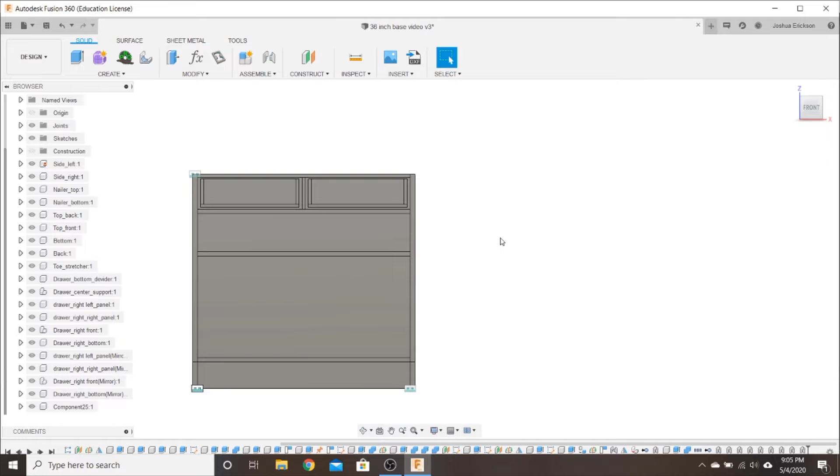This is going to be video 4.5. I realized that I had skipped some steps in the last video when I went straight to creating tool paths for this cabinet. I did that without showing you guys how to create your doors and without showing you how to modify the cabinet and to actually build out your cabinet and to bring more cabinets into this.

Also, I said in the beginning of this series that we would be able to do every cabinet in your kitchen with this one file. And I think you could do it, but it took me longer to go through and to edit all of the parameters that needed to be edited and then to fix whatever little issues might come up to turn this file into an upper cabinet. I think it could be done. I think maybe I didn't take the proper approach to do that.

I had trouble when I adjusted the toe kick parameters to 0 because the upper cabinet doesn't have toe kick. When I adjusted it to 0, it threw the shelves and some others. It just kind of made it all wonky and it didn't work very good. And I think it's because of this board here. It didn't know what to do with that or where to go with it, so I just tried removing it. And it just got weird, and it took me longer to change the parameters and to figure all that out than it did to just make a new file for your upper cabinet.

So I'm revising what I said a little bit. You can make all of your lower cabinets from this one file, and then you'll do a second file for your upper cabinets, but the process is the same. The upper cabinets are nothing but your carcass and a couple of shelves. No drawers, no center divider, no toe kick. The only difference for your upper cabinets is that instead of just these two spanner boards, it'll just be a full top. But that's the only difference.

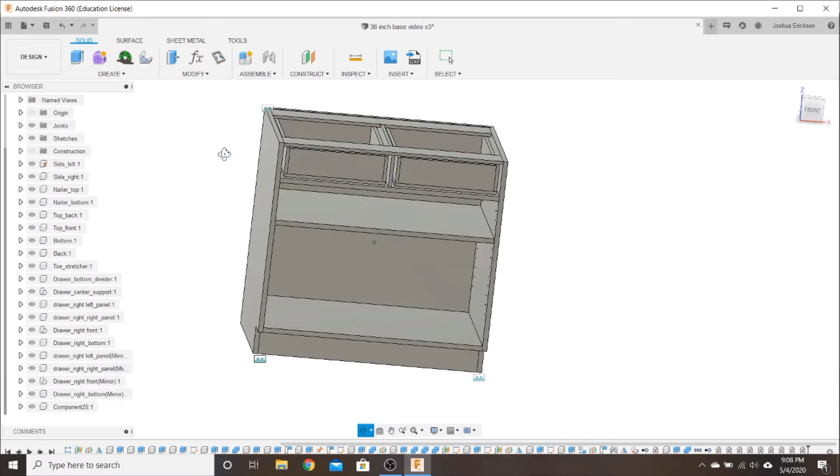So what we're going to do here is create the drawer fronts and the doors. So the first thing we got to do is create a new parameter, and that parameter is going to be named front gap, and that's going to represent the gaps between the doors and the gaps between the drawer fronts and the doors and just the gaps all the way around. Should all be the same. So I'm going to start with a 1/16 of an inch.

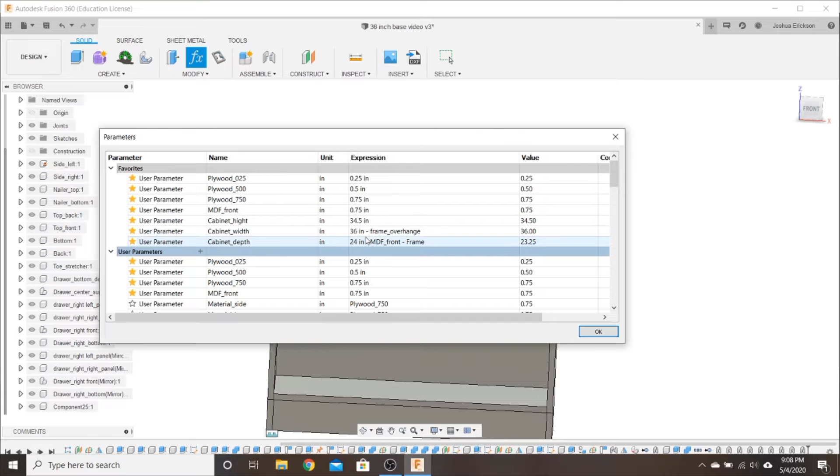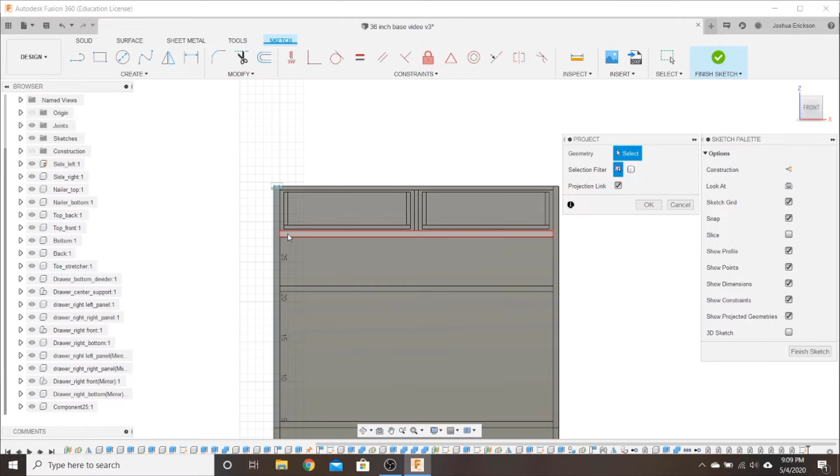Alright, so we're going to create a sketch right on the front of the cabinet. And now in this sketch, we need some information that we don't yet have. Well, we have the information, we just got to move it. So go to Project Include and go to Project. And we want this, pretty much the carcass is what we want, all the way around. And hit OK, and now you see it went purple, so we have that information now in our sketch.

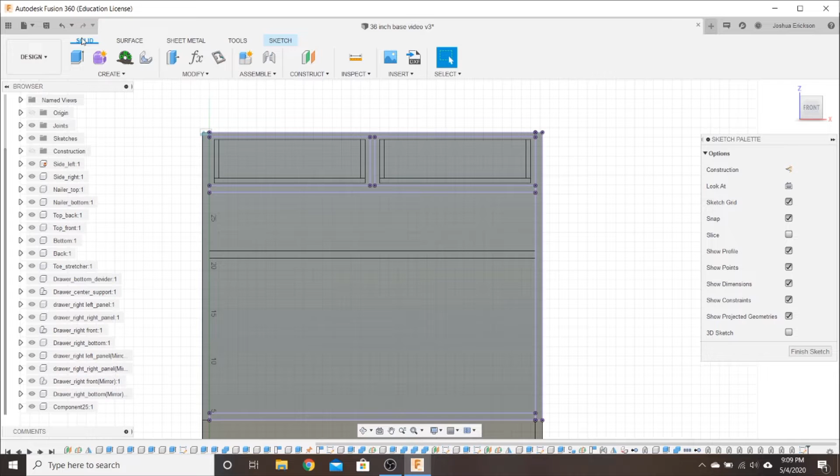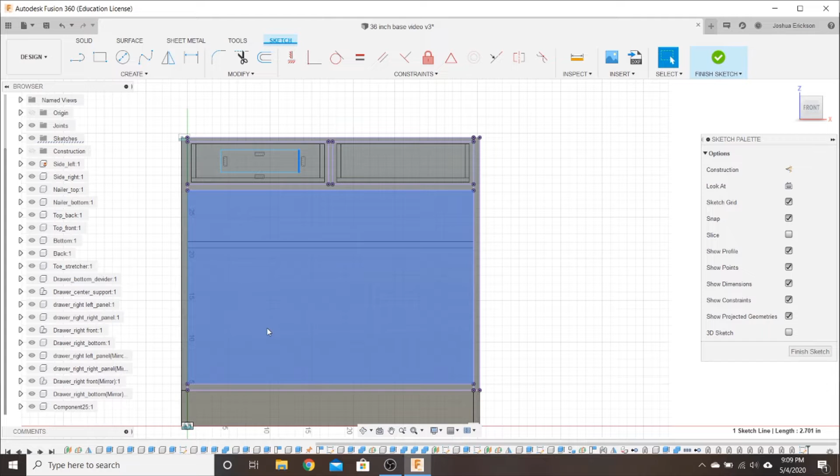So we're going to create a box for our drawer front, and we'll dimension this box out. Oh no, not yet. We need some reference points yet. We need to know where center is here. And we need a horizontal line here in the center of this board. So we're going to draw a line and zoom in here, and if you hover down over center, you see that triangle pops up? That tells you you're over center.

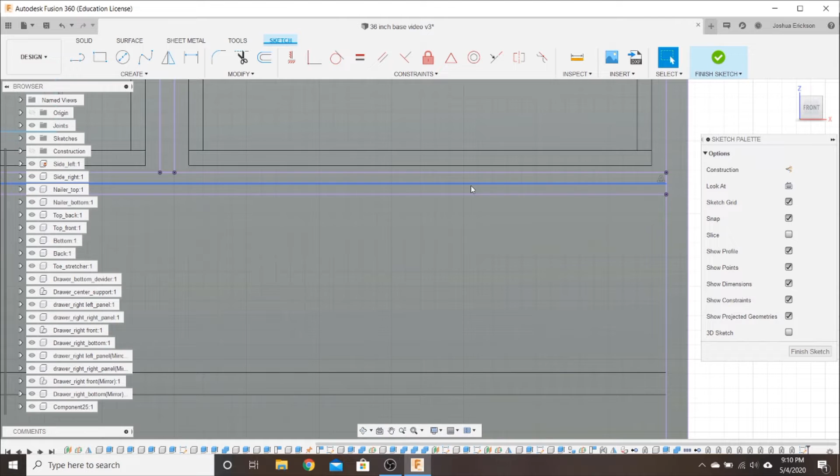Right there. This line represents the center where the drawer fronts and the doors meet. So if you right click on that line, we're going to turn it into a construction line. That means it's not going to show up anywhere else. It just helps us design here.

And we need to do the same thing here, so we'll find center, and we'll come all the way down to this line. And if you notice, you can see the degrees there. We want a plumb line. We don't want it to be off. So once you find 90, it also shows center there of the cabinet. Click on that and turn it to a construction line.

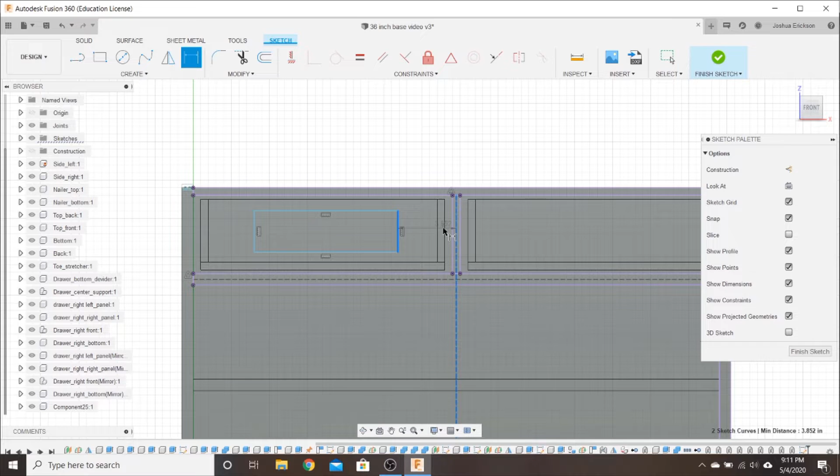All right, so now you can kind of see our 4 quadrants here that are going to be the doors and the drawer fronts. So we'll dimension this out. D for dimension, come over and find that construction line. And this is going to be front gap, but it's going to be front gap divided by 2.

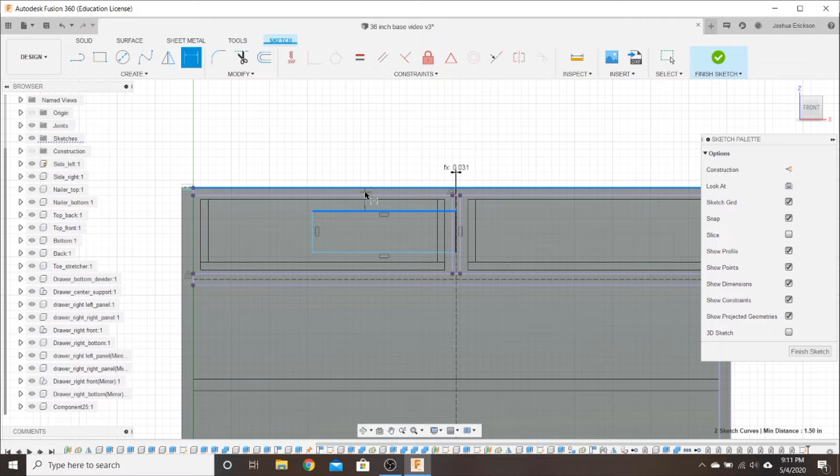The reason for that is there's going to be another one over here with front gap divided by 2, and that will give us a 1/16 of an inch gap right down the middle. So we'll dimension it to the top of the cabinet, and that'll be a 1/16 of an inch.

Now my countertops are going to be stone or some kind of manufactured stone, so there'll be no lip at the front of the cabinets. A lot of laminate countertops will have some kind of lip that drops down over the front of the cabinet. So make sure you're aware of that if you create your cabinets first and don't have room for that lip - you might have to move this drawer front down a bit.

This is front gap divided by 2 again, because there's going to be a cabinet on the left side of it. And this here is going to be front gap, again divided by 2.

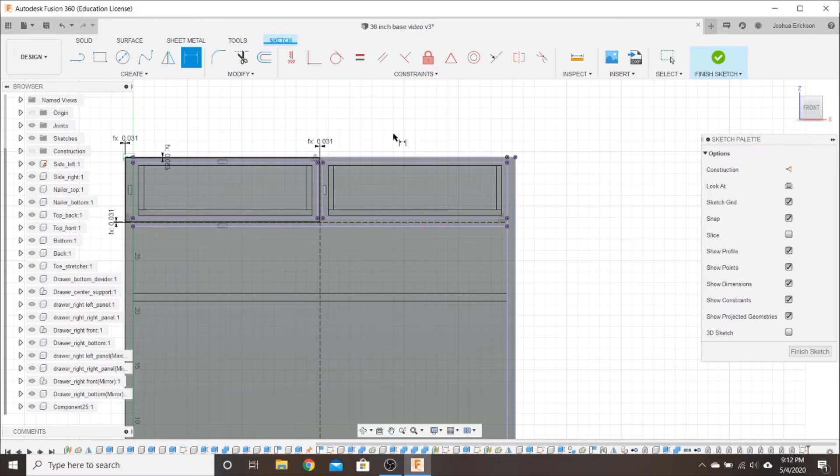Alright, so there's our drawer front. And we could mirror it, or we could just draw another one. So let's just draw another one, since it's not that difficult. Draw it out, dimension it.

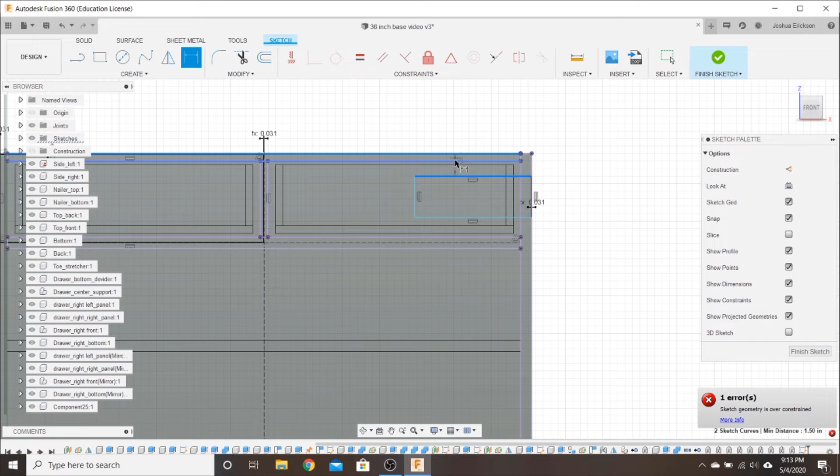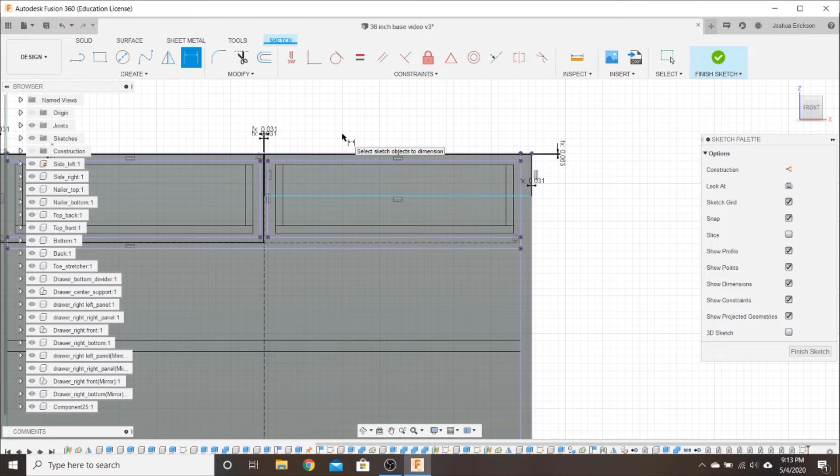What was that? Come on, you. There we go. I don't know, I was going too fast maybe.

So that's our 2 drawer fronts, and if you zoom in, you see we got a nice little gap between the 2. So now we can do our doors.

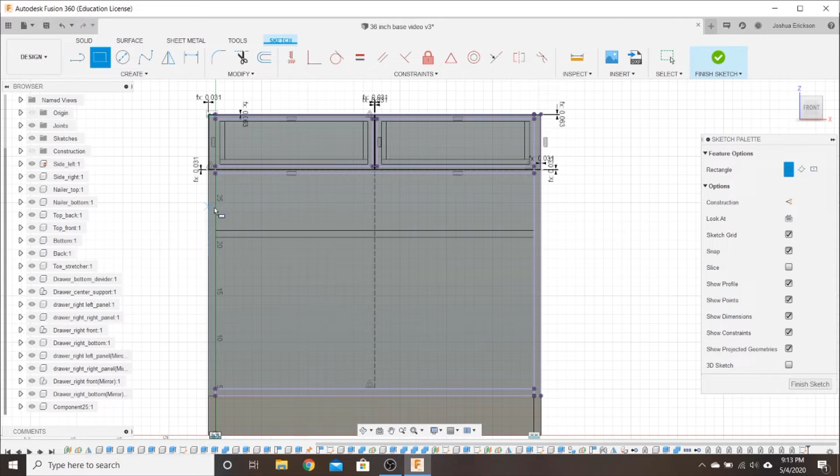So we'll just go ahead and draw a couple boxes right away and dimension these out. Oh my goodness. I'm hitting something.

I zoomed way in there because I wanted to make sure I got my construction line and not the bottom of the drawer front.

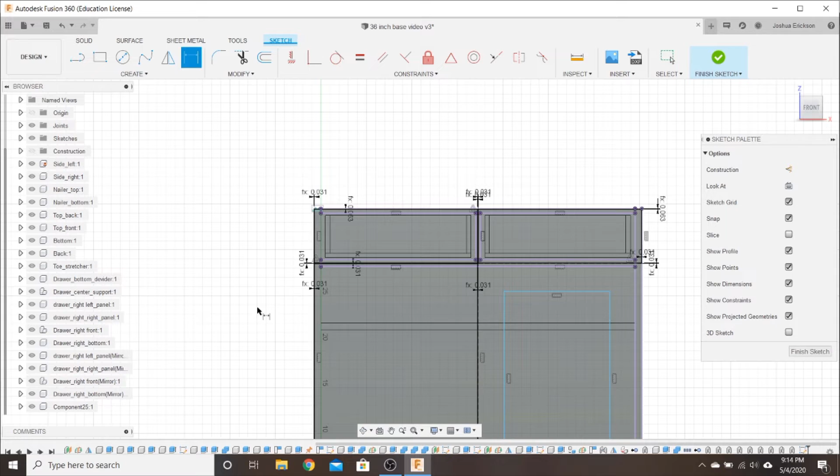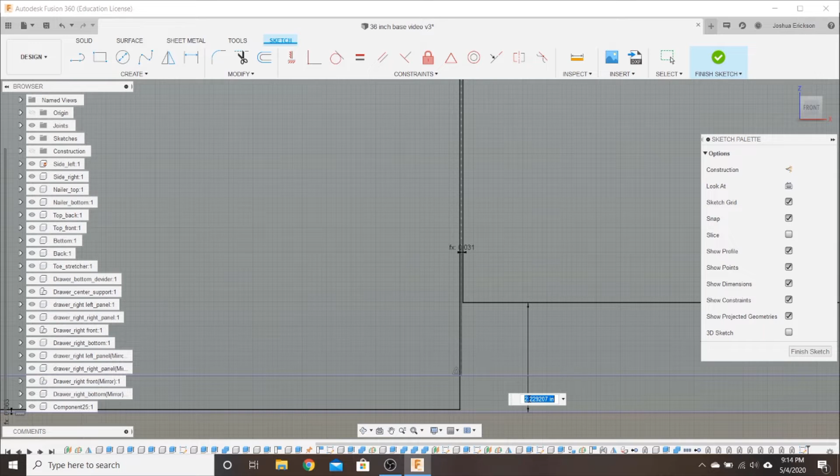Same as this. And this is not divided by 2 because it's the bottom - there's nothing underneath it.

Come on, man, what are you doing? I'm going too fast, that's the problem. I'm hitting buttons.

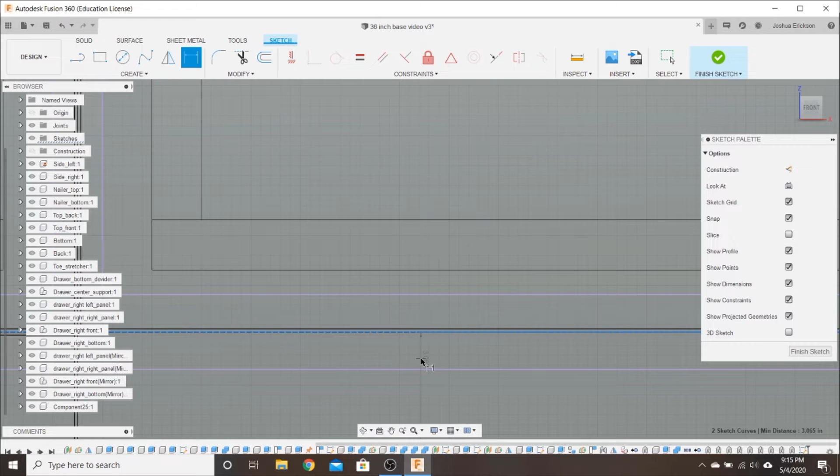And last one. Alright, there we go. There's our door fronts and our bottoms.

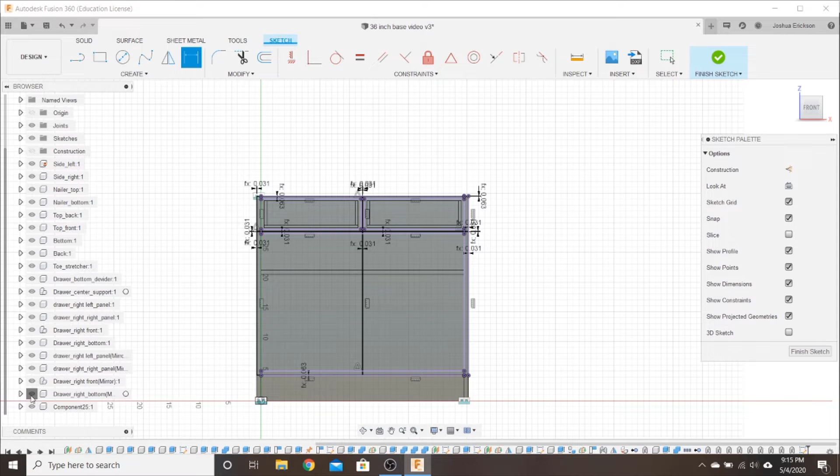So now what we can do is we can turn some stuff off here. Yeah, we'll just pretty much turn everything off.

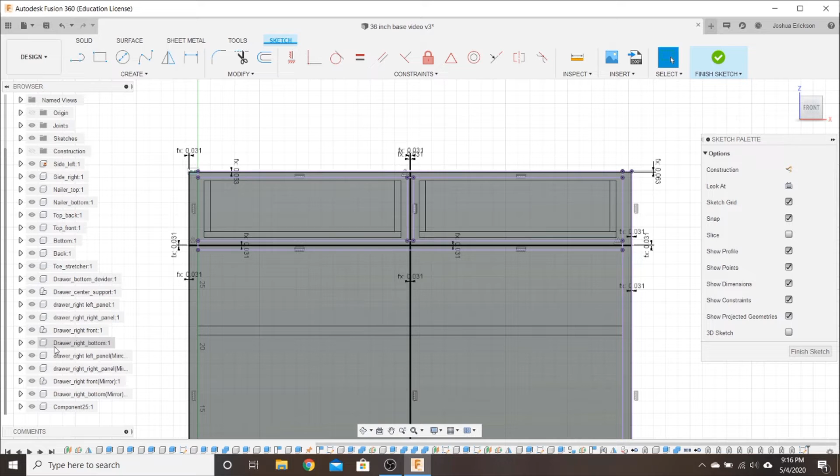What? I just hit Control Z for some reason. I'm sorry, guys. Struggling.

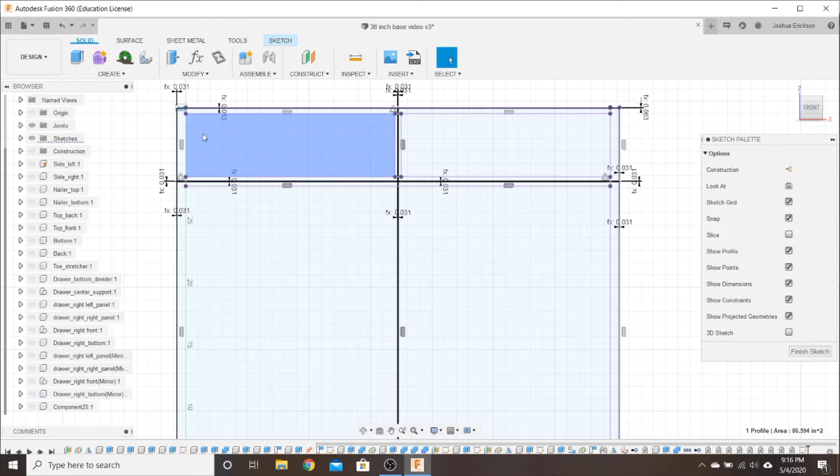Alright, so now we want to extrude these out. So we'll start selecting, and you gotta go around, and because we have this geometry from the cabinet, it doesn't assume to know what you want. So you gotta hold down Shift and go around and click on what you want to extrude.

There, and we'll extrude that, and this is going to be material - MDF front is what I named it. And it's going to be a new body - I'll make it a new component. Hit OK. Alright, so there's one of our drawer fronts, but we want to do more.

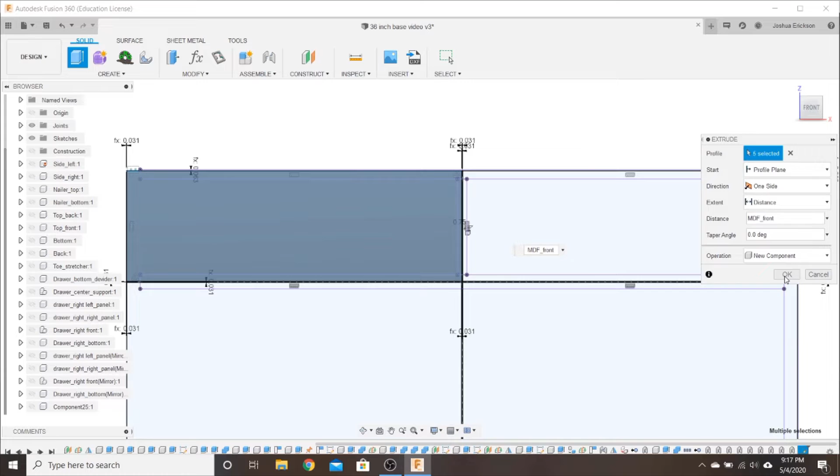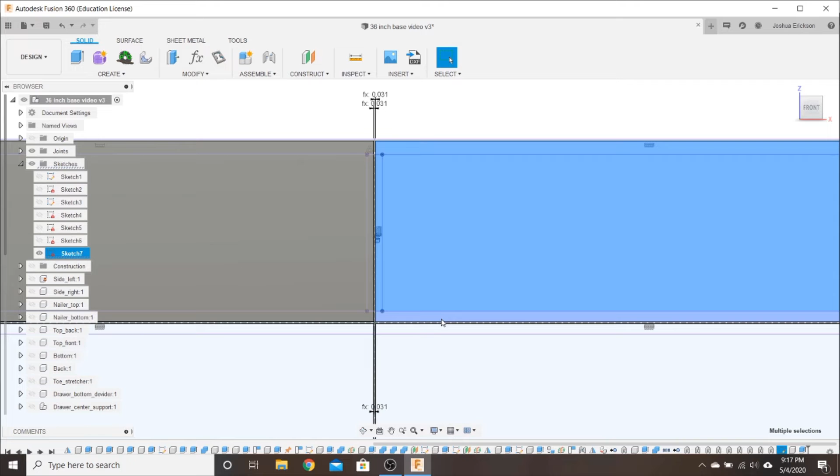So we'll get that sketch visible - Sketch 7, now it's visible - and we will continue to extrude out items here. So this is MDF front, new component, okay.

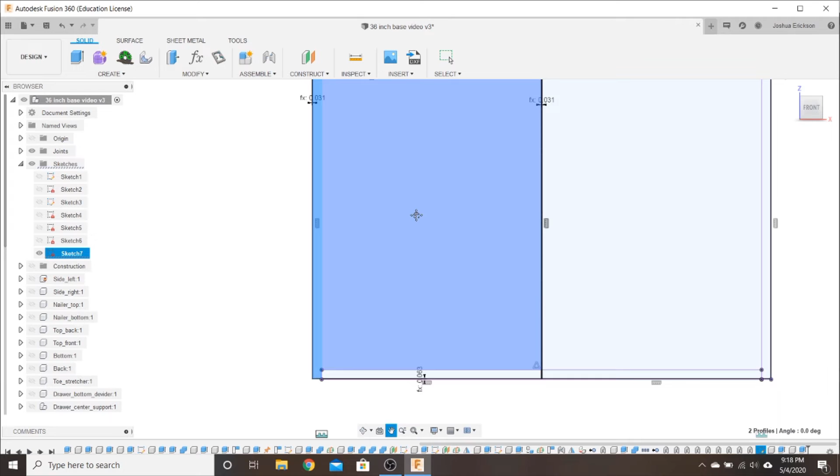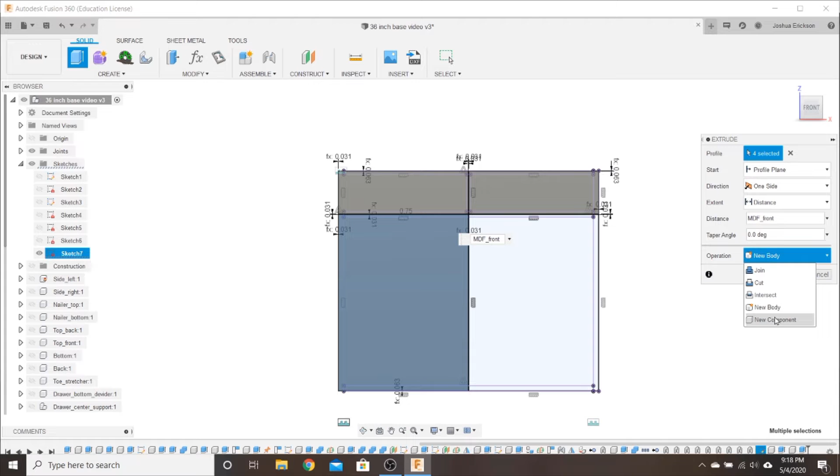I think my problem is I'm doing it at the kitchen table, and the mouse is not working well on the wood surface as opposed to my desk and mouse pad. MDF front, new body, new component, excuse me, okay, last one.

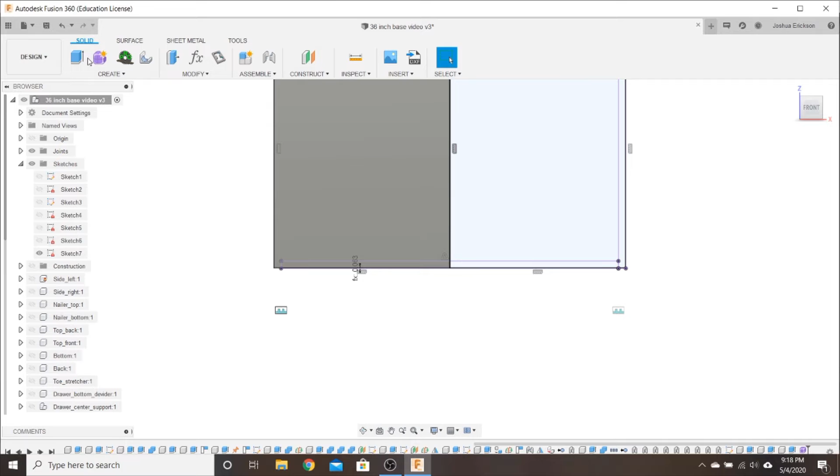Just struggling tonight, guys.

Alright, so there they are. Let me turn that sketch off. You can see we got nice even gaps all the way around. It's not a big enough gap that you're ever going to be able to see into the cabinet - it's 3/4 inch thick.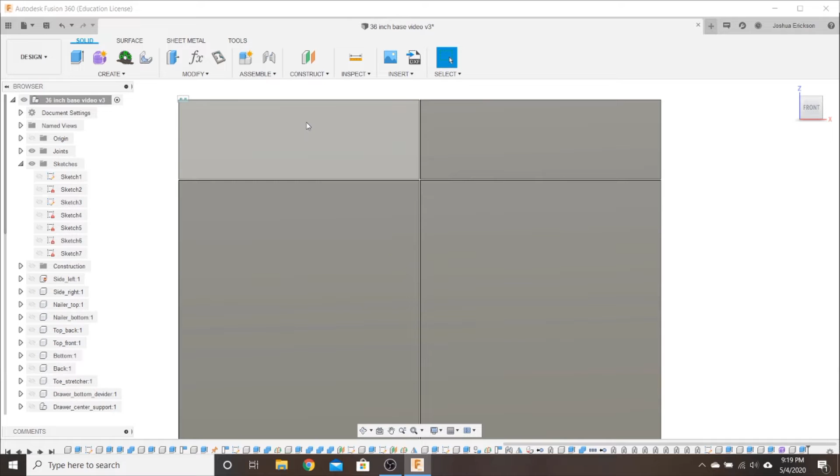So now what we can do is we can come up with some kind of style. My drawer fronts here turned up to only be 5 inches and whatever that is tall - I'm having a brain fart.

So I'm not going to do any kind of rail and stile on these - these are just going to be blank, flat. But I will do something here. So I think what we're going to do is just a very clean, basic frame and panel.

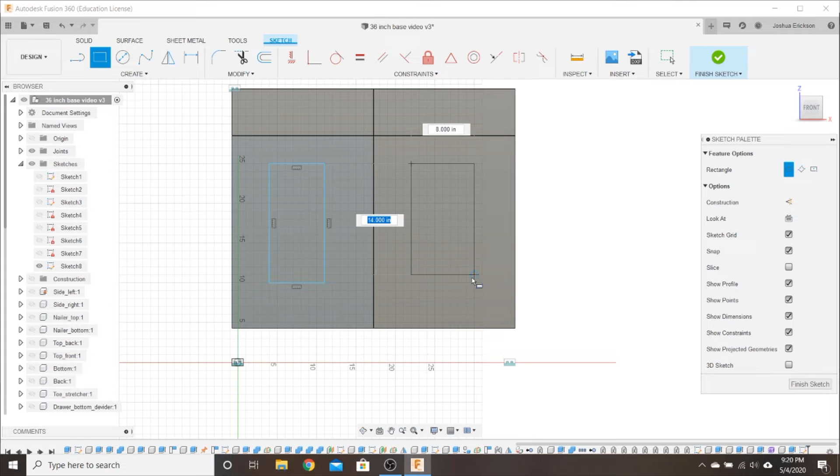So we're going to create a sketch right there, and we need to draw a couple squares. And now we're just going to dimension these against the door, and we're going to create a parameter for this.

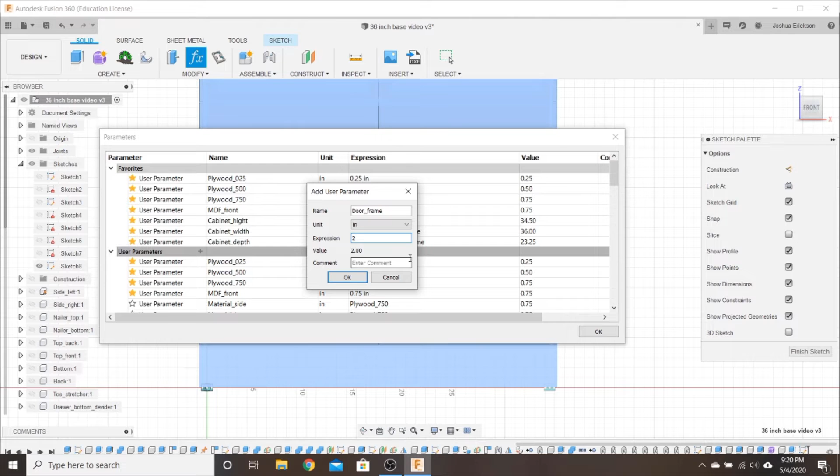It's going to be called door frame, and we're going to say 2 inches. So our frame - the rails and stiles - will be 2 inches thick, and that'll be adjustable. So we'll dimension that and say that is the door frame, and go all the way around, making sure you get your door.

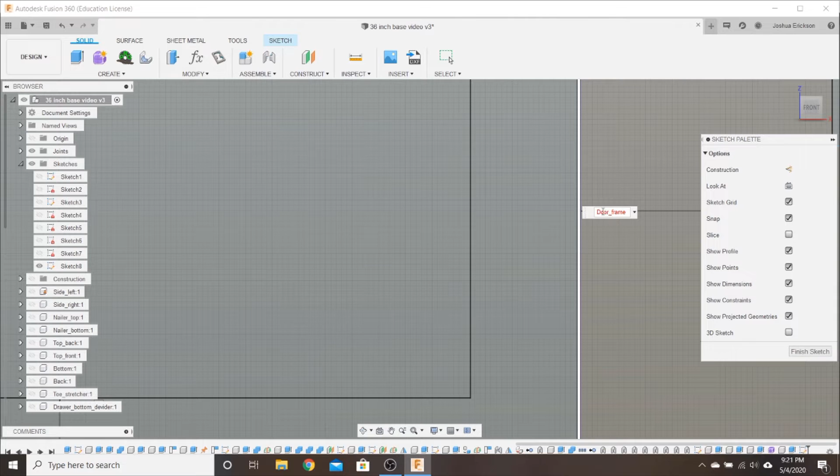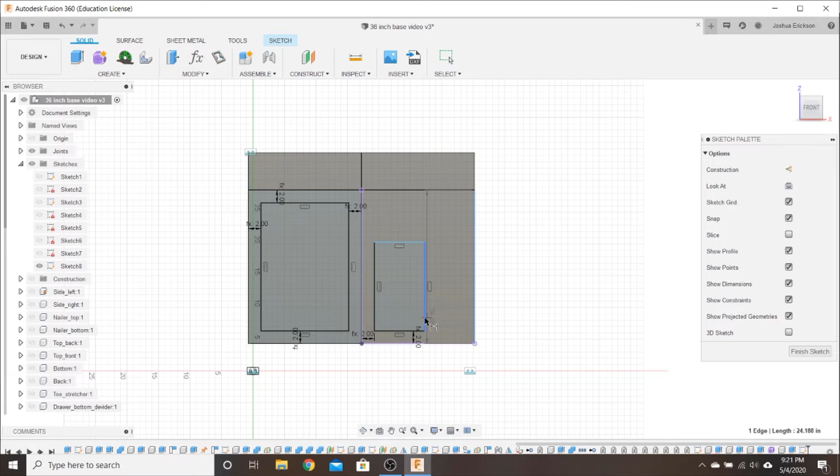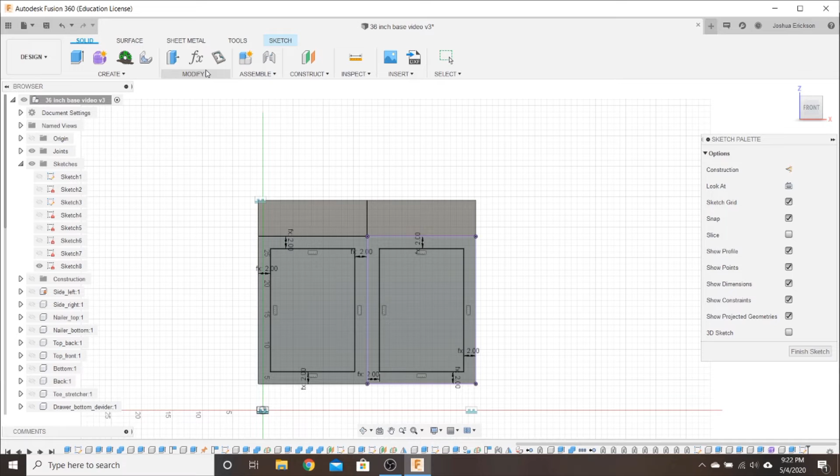Why can't I get to that? It's making me choose the line on the door first. I don't know why, I'm no fusion expert. Alright, so there we go, that's our frame and panel. So now we can finish that sketch and we can just sink these in.

So I like to use the extrude key, and we're going to go negative. The MDF comes at 18 millimeters thick, so close enough to 3/4. You could set them in as far as you want, and you could make a parameter for this.

So why don't we do that? We're going to call this door panel, and we'll just start with 3/8 of an inch and see what that looks like. It's basically half.

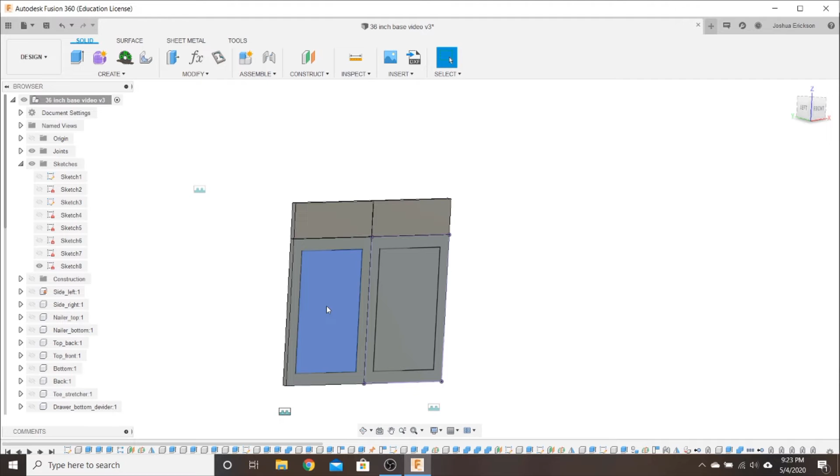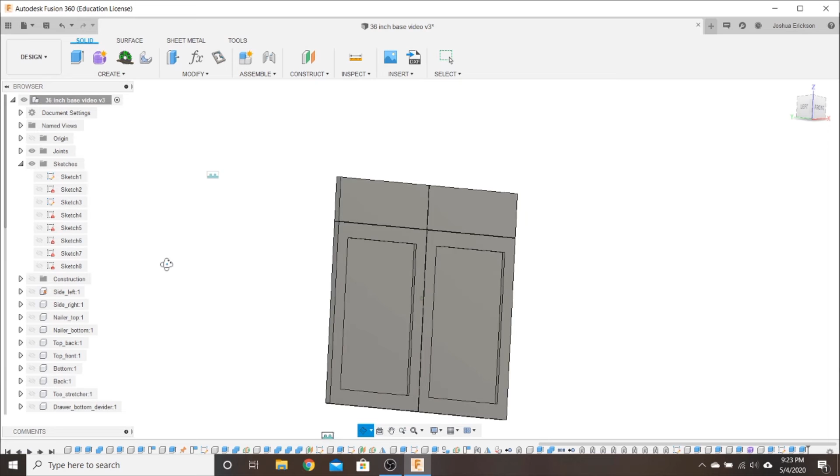So make sure it's going in the way you want it, and we'll go negative door panel, and turn the sketch back on and do the same thing for the other door. And so there you go, there's your doors, frame and panel. I think that's too deep.

I think that's too deep. We're gonna go 1/4 inch. Yeah, probably can't really tell a difference, but I think that's better.

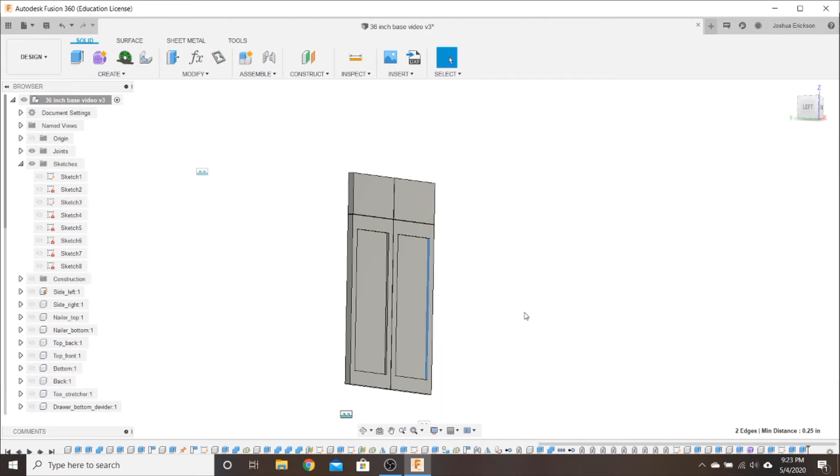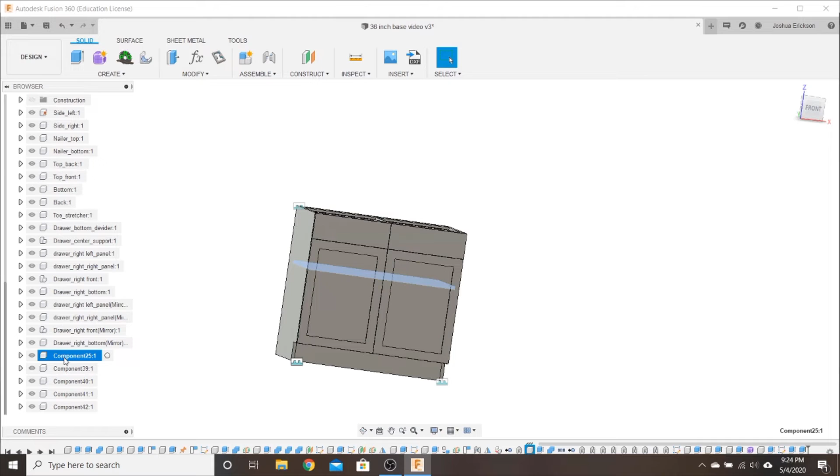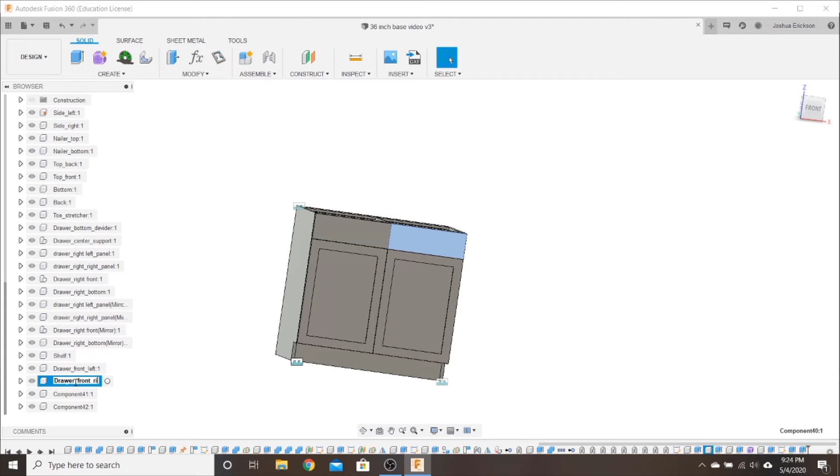All right, so there it is, with doors. We'll name the doors here. Oh, that should be named shelf. And this will be drawer front left, right, door left, and door right.

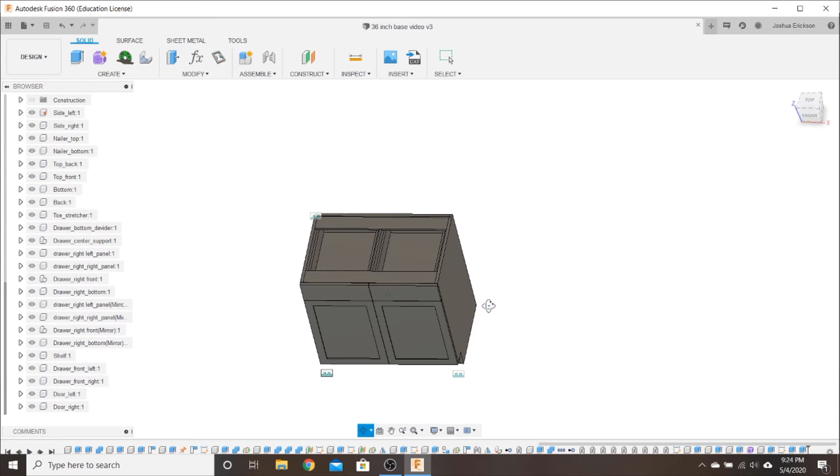Okay, so make sure you save it. So for the purposes of this series, this is our finished cabinet, ready to cut.

So what I've done is I've saved it as 36-inch base. Now what I can do is go to File, Save As, and we'll call it something different. Let's say you needed a 37-inch cabinet, because you don't want to put a filler, but you need a little extra room. So 37-inch base. Hit save.

Alright, so now we're in the 37-inch base. So what we can do is go to parameters, cabinet width will be 37, and hit OK. So now we have a 37-inch cabinet. So we'll save it.

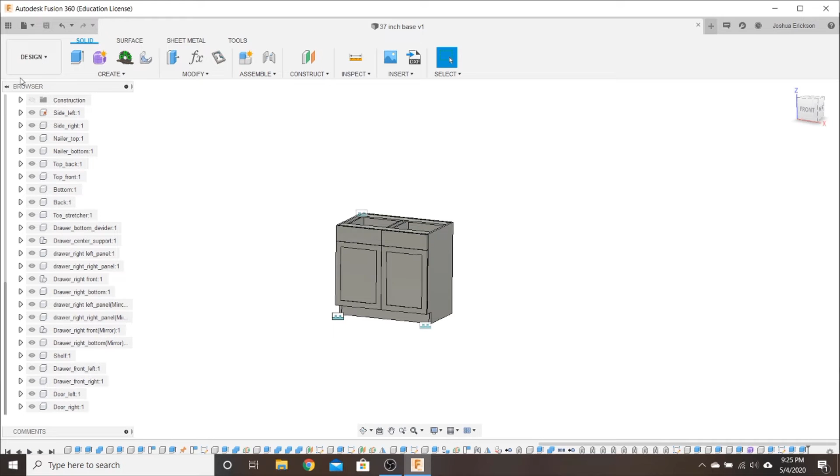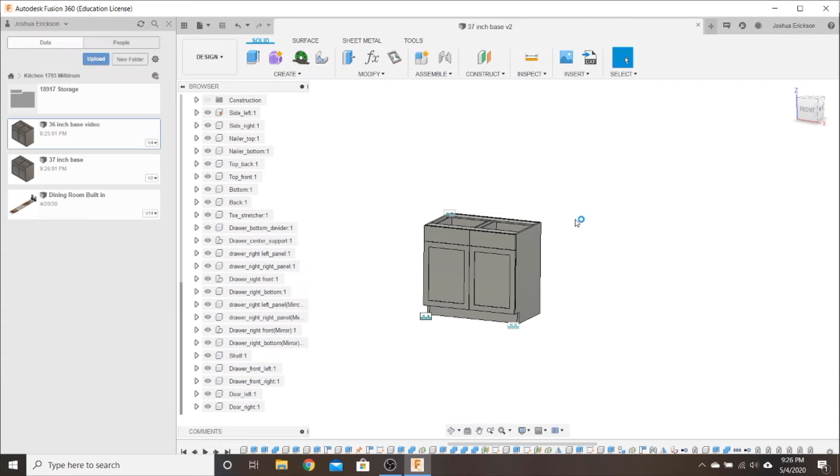And we will bring in this. All I did was went into my project file, and when I hit save as, obviously it makes a new project, a new file. So we have the 37-inch base, and here's our original 36. You just click it and drag it and bring it all in and move it over, and then hit OK. So there you go. Now you have a 37-inch and a 36-inch.

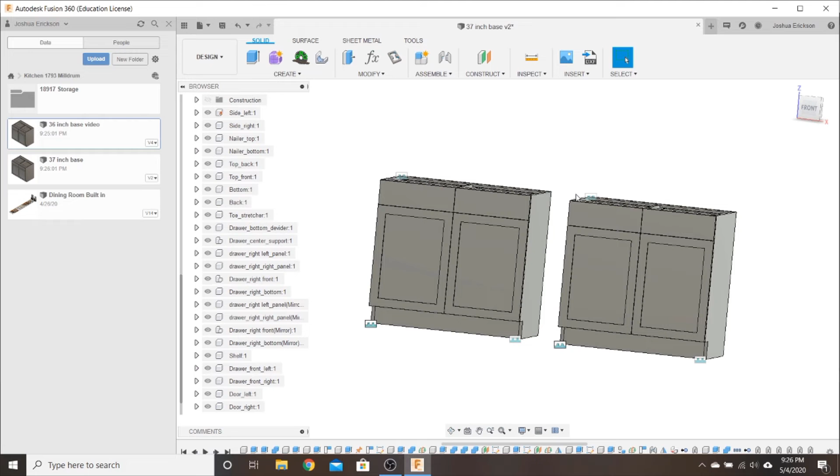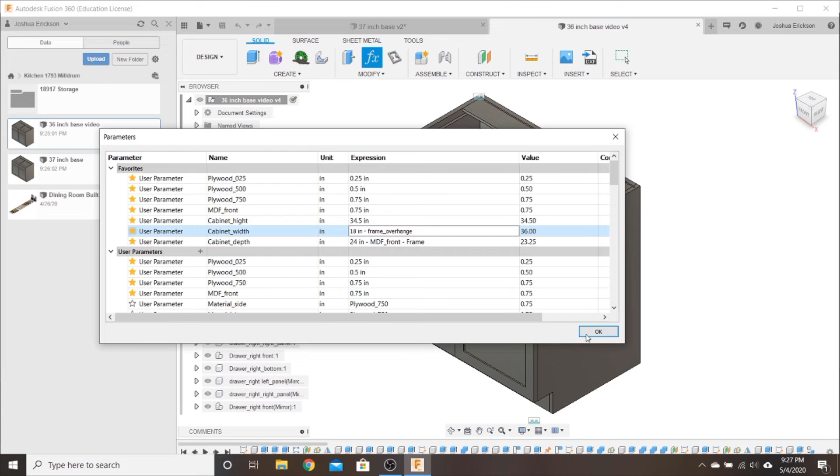Now, one thing you'll have to do, like if we saved one of these as an 18-inch cabinet, I'll open this up. If I wanted this to be an 18-inch cabinet, you will have to go in and delete some drawers. So you don't want these ridiculous tiny drawers, and you also don't want these ridiculous tiny doors.

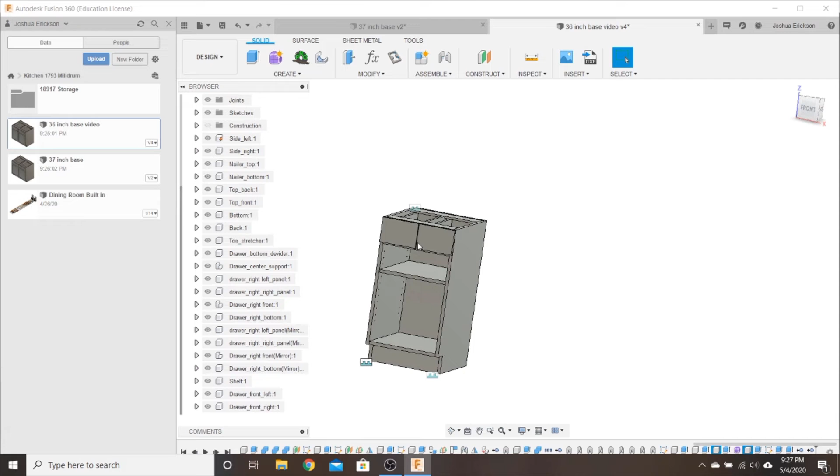You'll have to remove those, and that's easy. You just go over here, left click it, and hit remove, and then you would build your new door. And obviously this program's not magic.

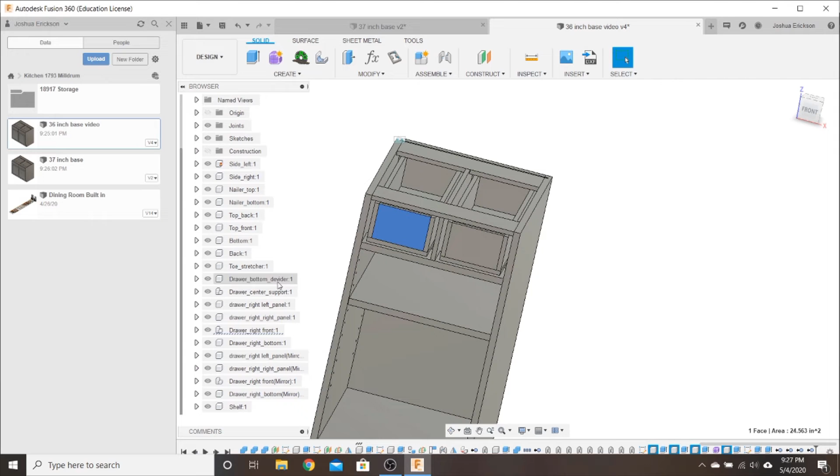There is some work you have to do. Same thing with the drawers and the drawer fronts. Let's see, we'll just remove all these. So you'll have to go through, and you don't need the center divider.

Not that mark. What are you doing here? Remove. So you gotta go through and you gotta remove these, because you, like I said, you don't want, unless you want 9-inch drawers.

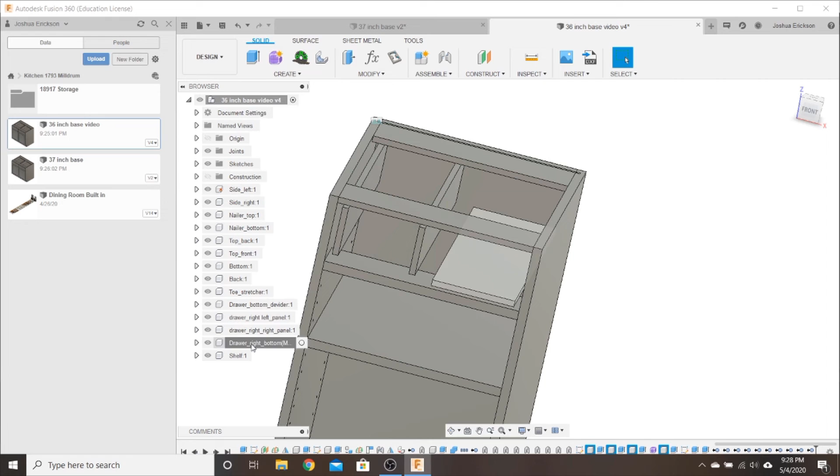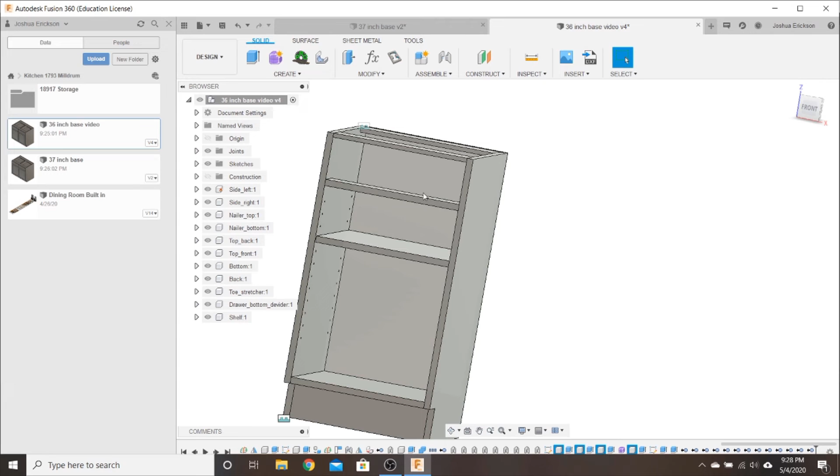And so now there you go. There's your 18-inch cabinet, and you would just have to redo your drawer, which is not the end of the world. For each cabinet you gotta do, you just gotta design a drawer instead of doing all this work all over again. I think that's pretty good.

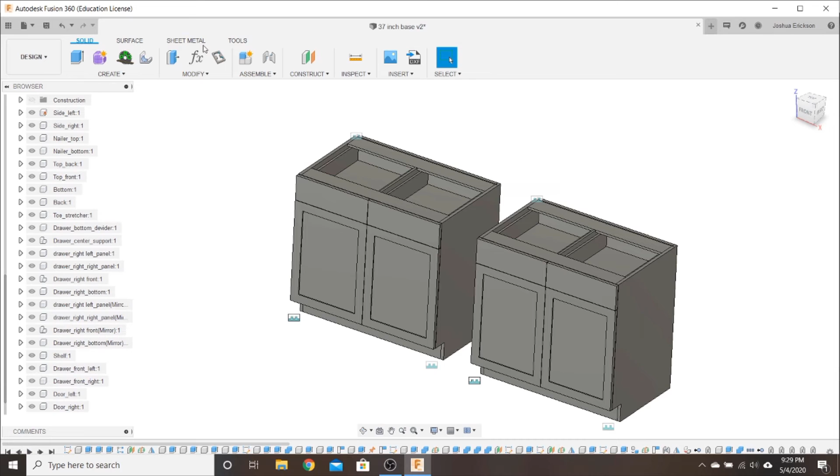So let's save this file, save as, and we'll call it our 18-inch. All right, now you can go back into your master here, and you can bring in your 18-inch.

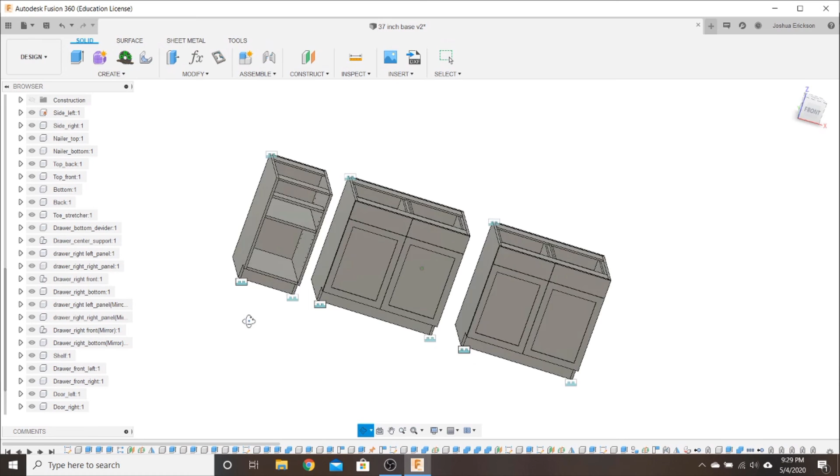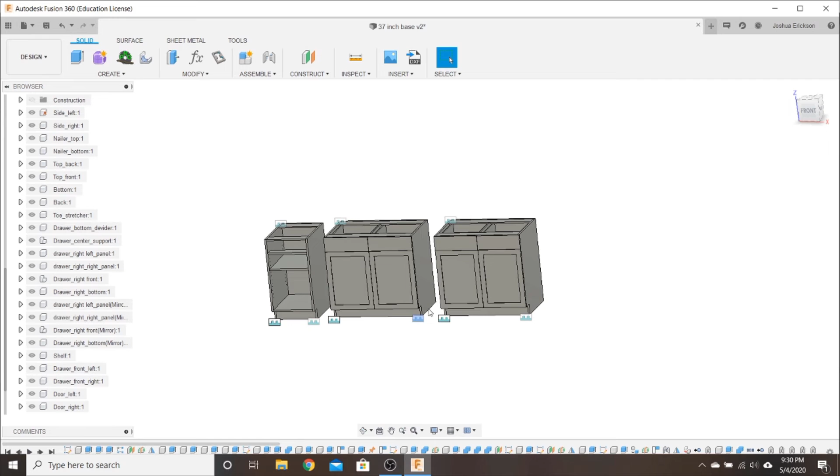And so there you go. So now we're starting to build out our cabinets, and you can go through the work and join them all up to kind of create something for if you're doing this for a client, and you can apply appearances and wood grain to it, but I'm not going to do any of that. This is just to show you how to change the parameters. So I've demonstrated here that you can create one single cabinet and get multiple cabinets out with minimal work.

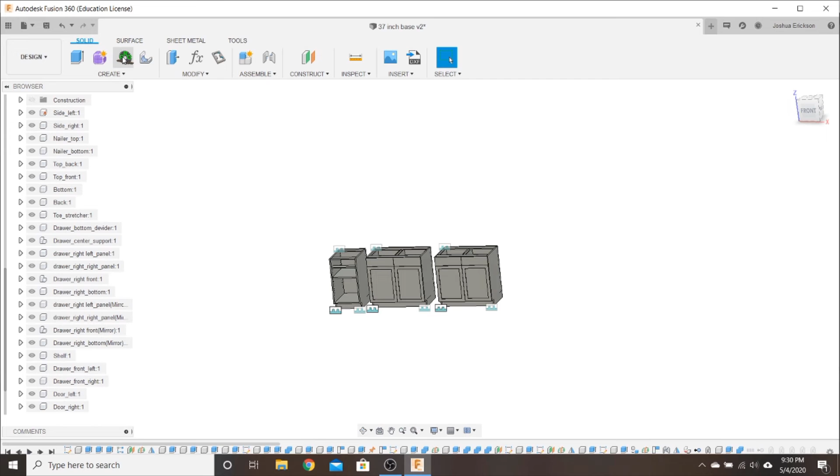And it shows you the different size material that you have here. So let's just do...

Let's just cut the 1/2 inch material first, so basically just the drawers first. Select that, and then you can go to options, and you can tell it how you want it to nest your product, your parts. How big is your router bit going to be?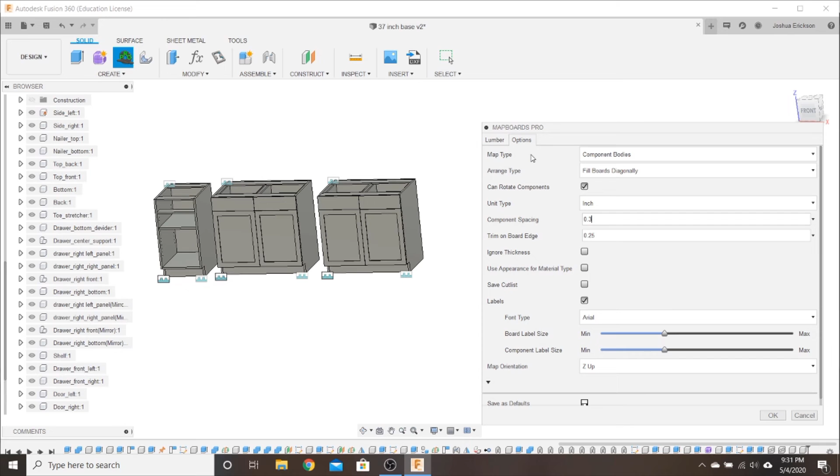You would put that in here so you get the correct number or the correct amount of space between them. So I'm just going to go a little bit bigger. Okay, and hit OK. And it does its thinking.

So it's going pretty fast. I would ordinarily just speed the video up so you don't have to sit through it, but it's going pretty quick.

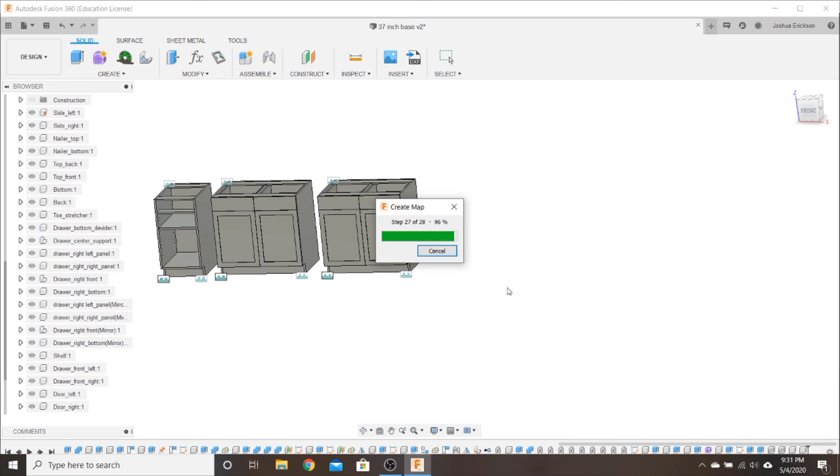All right, there it is. So there's all your 1/2 inch pieces. All of them have the gap that I decided what I wanted. It nests everything for me, so you can see...

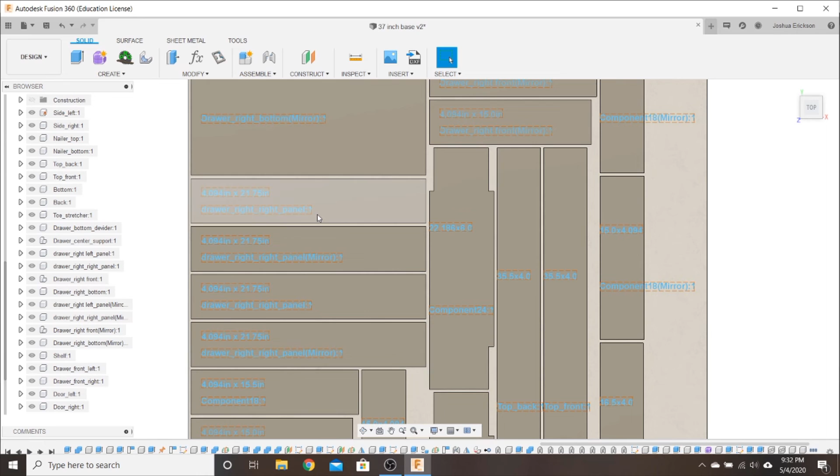This is the center drawer divider, and you can see this is why it's a good idea to name things. I don't have everything named, but you can see here's the drawer, the right drawer, right panel.

And so this would be all the 1/2 inch material in your cabinet. So for these 3 cabinets, it would only take 1 and a little bit. I don't have the drawers designed for the 18-inch one, but that's how you would do it.

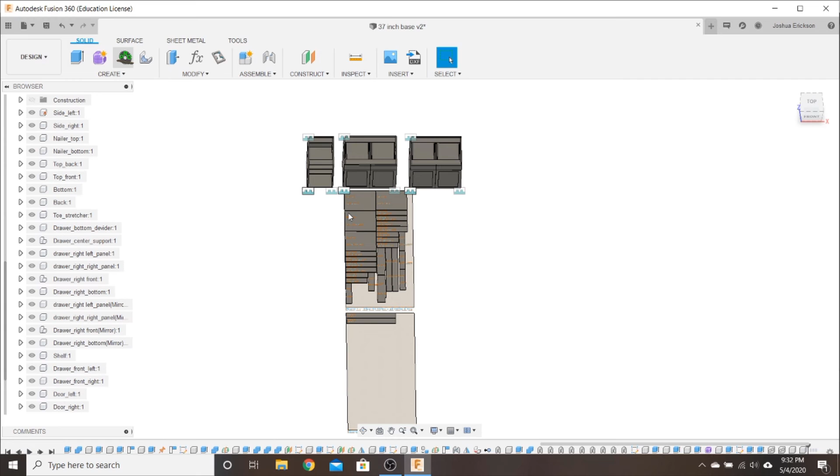And then you can take this, and in Mapboards Pro, in the options, you could tell it to output a DXF or an SVG if you have your own software that you want to use to create your toolpaths.

I use something different. I don't use Fusion 360 to create my toolpaths, so I would just export this as a DXF and then load it into my other software that I prefer, but you could also, of course, do it here too.

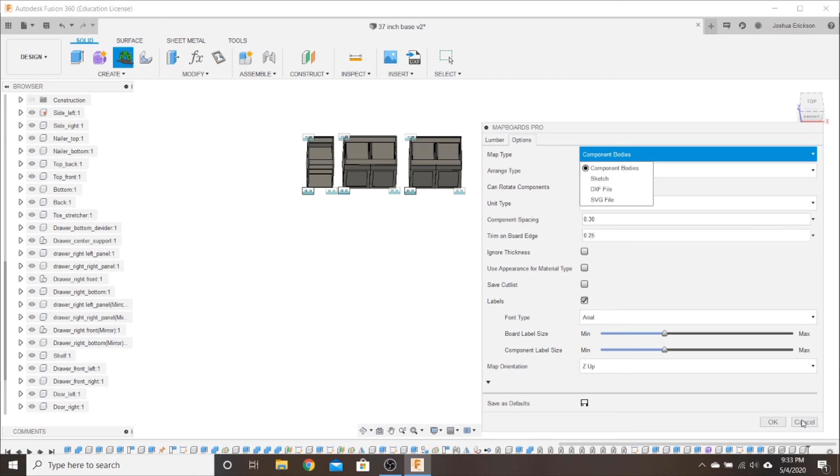So there you go. That is how to create your doors and your drawer fronts, and how to save them, alter them, and then bring them into your master file.

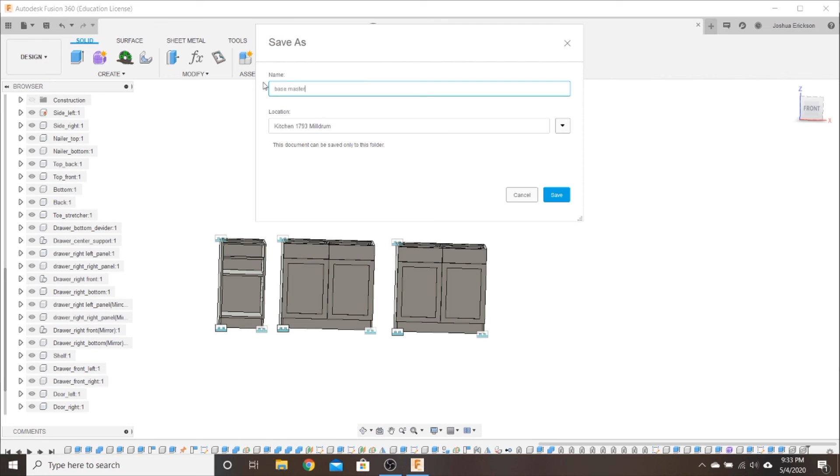So what I would do here is save this as the base cabinet, base master, something you'll know what it means, and hit save. And that's something now I can always go back to it.

Now, if you're working on your kitchen and you have your base master, this might be the best piece of info in this whole long video, and you open up a different cabinet and you go in here and you change something.

So let's say you measured your plywood and it came out to be, let's see, we're doing half as the example. Let's say it came out to be what it's probably going to be, something like that, and hit OK.

And you save it. Now if you go back into your master, parameters are not global. It's unfortunate, but they're not global.

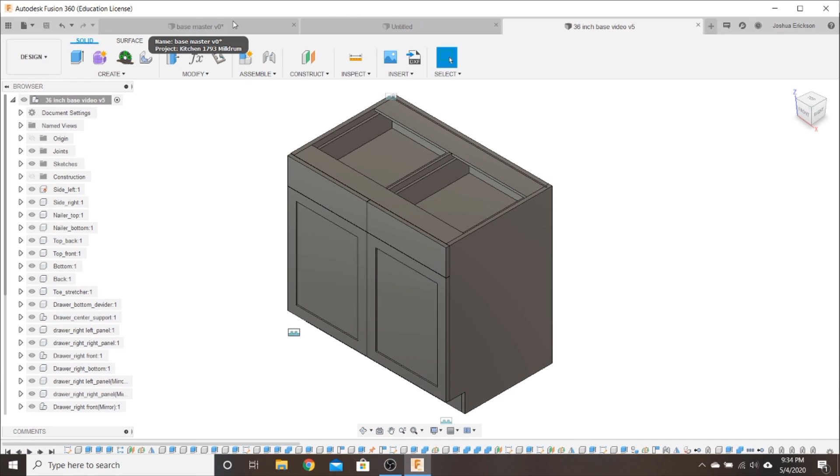So here is where you change things in the individual cabinet, because parameters are not global. They're only for this file. And then here's where you're going to nest and cut everything.

It warns you. So you can go up here and click on this exclamation mark, and it will update this cabinet. It doesn't update them all.

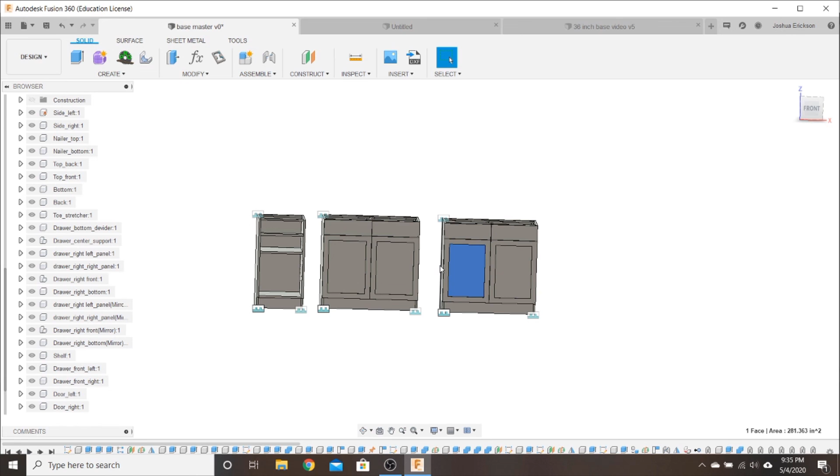So you would have to go, once you measure your material, you need to open each individual cabinet and input the material thickness and your drawer slide thickness, all of that. You need to put that into every single file, and then when you bring them all here, it'll bring the latest information, and then you can nest and cut.

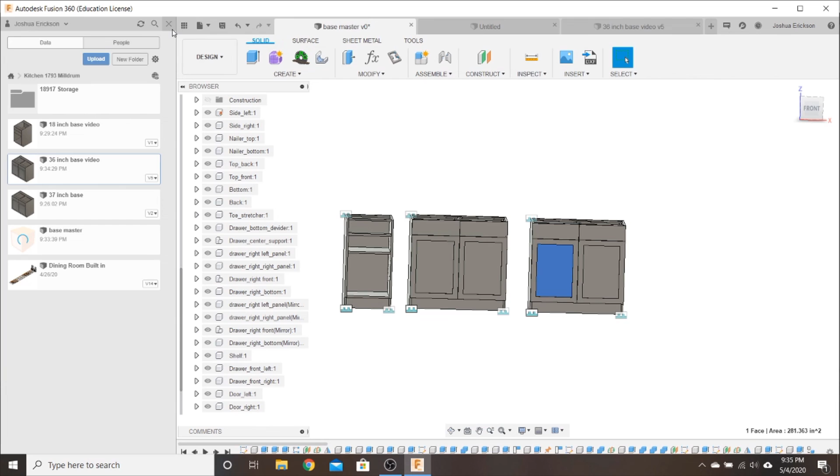So if we go back into base master, oh, I got an error. So I believe I'm getting an error because it's different 1/2-inch boards. So anyway, something to keep in mind.